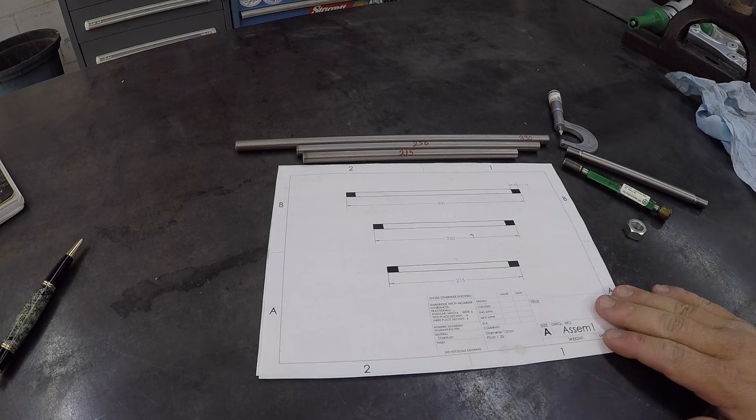We're gonna get started on our next little project here. So this is a job that I'm doing for one of my viewers. He contacted me some time back and asked me would I be interested in helping him thread 3 pieces of titanium. So he supplied the titanium.

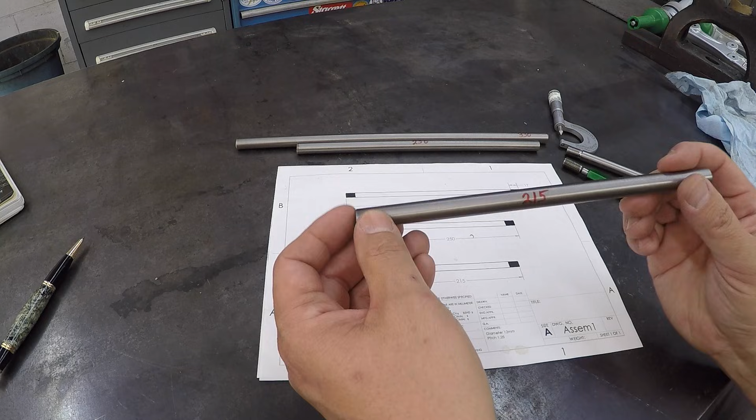This is 12 millimeter, and he just sent one piece, and what I did was I cut them to length, and I actually cut them just a little bit long, and I'll face the ends off. So we got one at 215, one at 250, and then one at 330 millimeters in length there. And then on each end, it's going to be threaded 17 millimeters back on each end at a 1.25 thread pitch. All right, pretty simple.

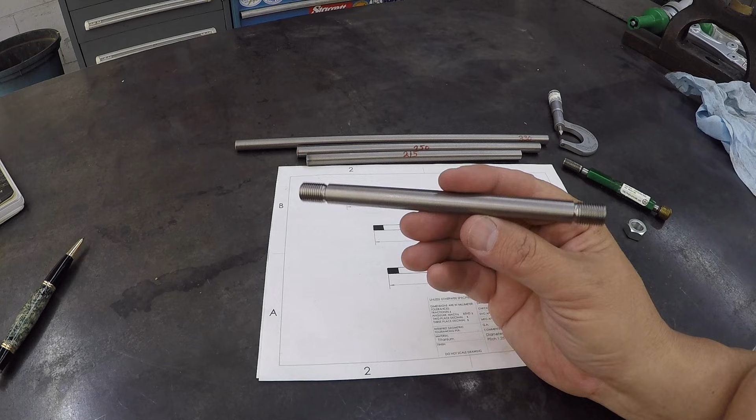Although rarely do I ever cut titanium, so hopefully it's not going to be that much of an issue. But I went ahead and took the sample piece that I had left over, and I went ahead and just did a little practice run, got the lathe set up for the right thread pitch, and you can see that we've actually got a pretty good looking part right here. Everything looks great. I did it just like I was going to do those right there.

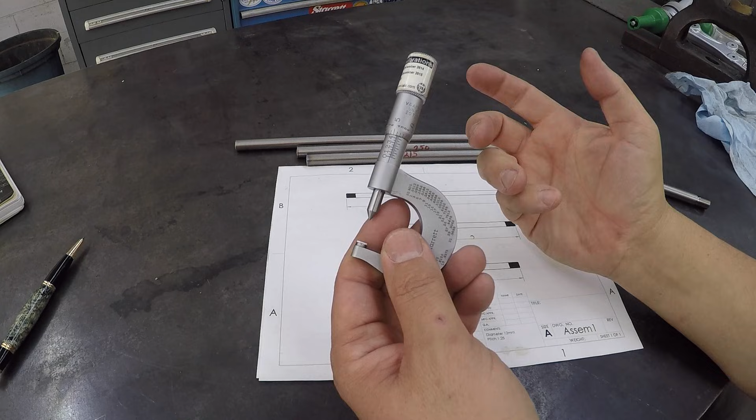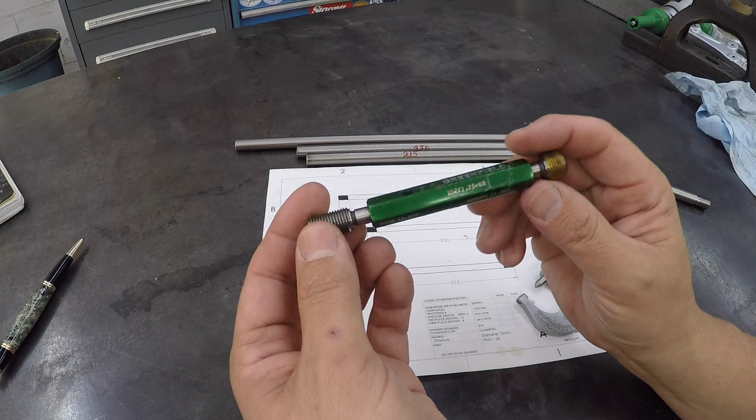And what I'm going to use to measure the thread pitch right here is my Starrett thread pitch mic. Now I do not have metric thread pitch mics. All I have is imperial sizing. So this one is good for 20 to 24, which is going to fall right in that thread pitch of 1.25. So what I do have is a metric go/no-go gauge for 12 by 1.25.

So what I have done is on the go side, I went ahead and measured the thread pitch here with the inch thread pitch mic, took a note of it, and what I'll be shooting for whenever I thread mine is approximately 2/1000ths of an inch smaller than what this thread pitch is right there.

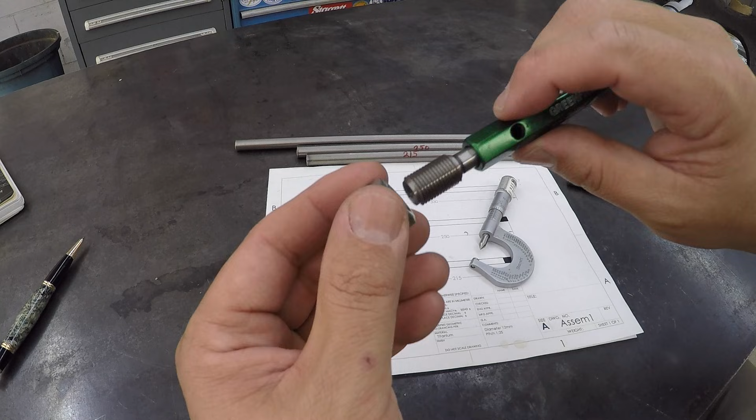All right, I do have a sample nut. I've got a little kit that I keep all different size nuts in, and it fits the go gauge just absolutely beautifully. So you want just a little bit of clearance in that, and that's what I've accomplished with my sample piece. I've gone in there and got it a couple thousandths undersize, and it fits the nut really nice.

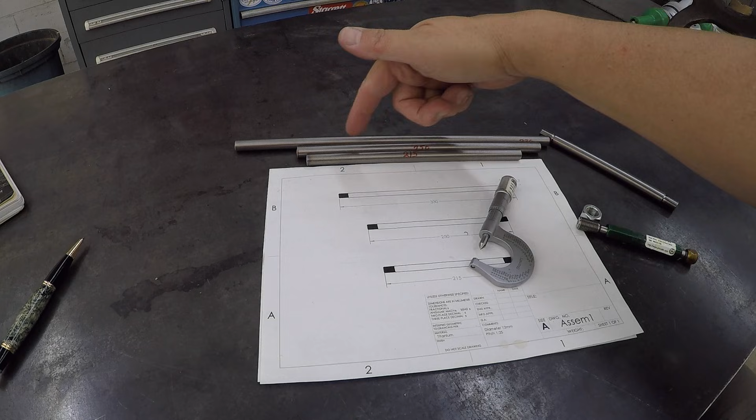So what I'll probably do is go ahead and set them all up, get the ends faced. We're going to machine an undercut with a radius tool, and then turn the OD down about 5/1000ths, because this is exactly 12 millimeter. And then once I have all the ends machined ready for threading, then we'll go in there one at a time, cut the thread. We get one side threaded, flip it around, cut the other side. All right, so let's go down to the Victor lathe and get it done.

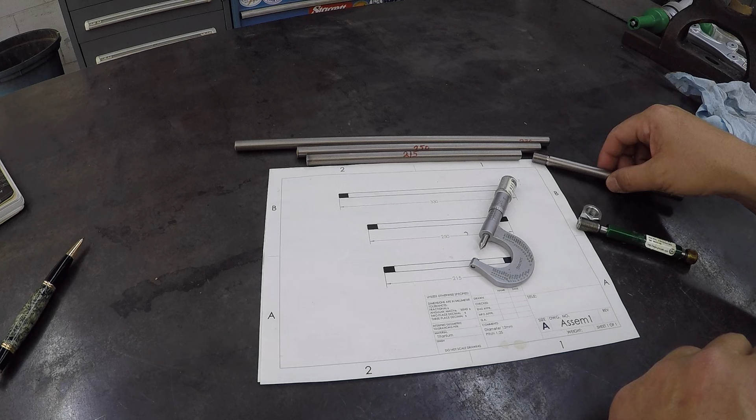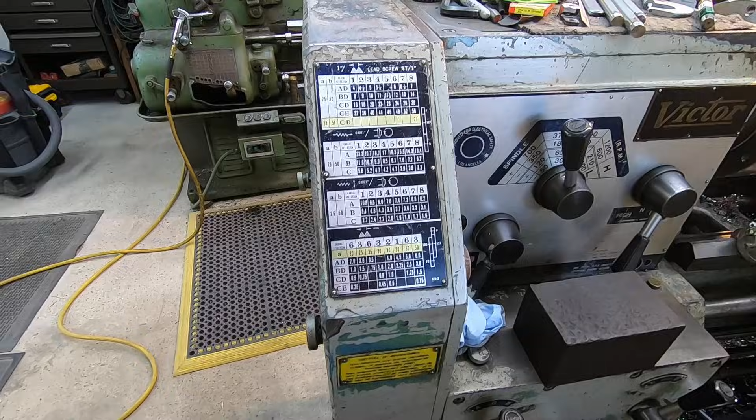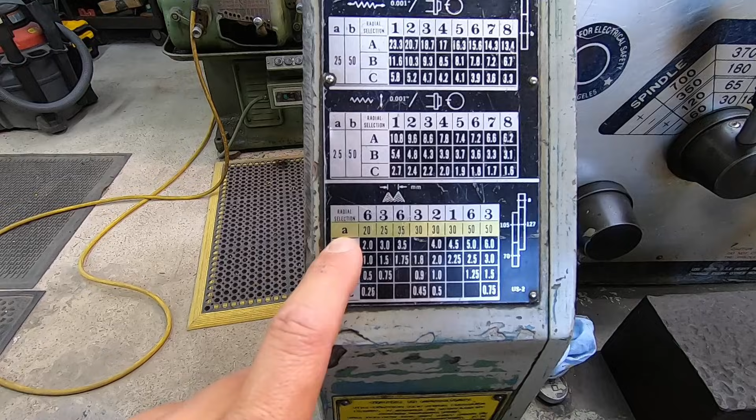All right, we're set up to do our threading now. I thought I would go ahead and show you the machinery setup. On the Victor lathe, you got to swap out the quadrant gears, and so we're going to be cutting a 1.25 right there. So this chart tells you what gears you need to run. If you see A, go across to this line right there and down to 1.25, it's telling you that gear A right there is a 50-tooth gear, and then you got to have the 127, the 105,

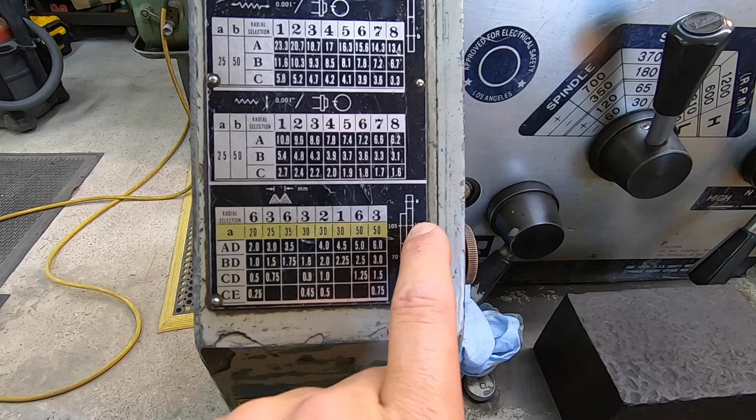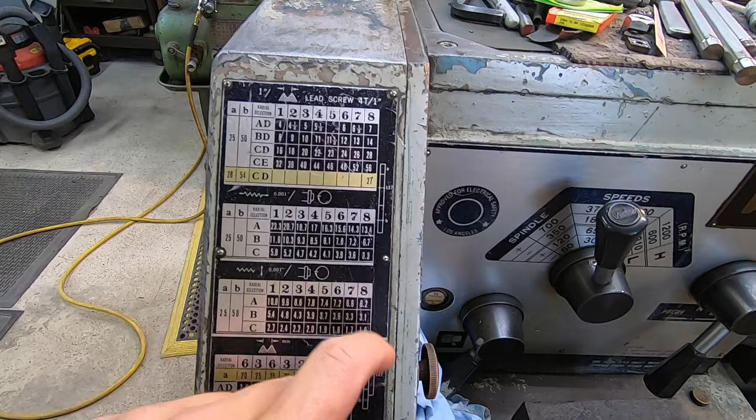and then the 70 at the bottom. Whenever we're normally running up here on this one, you've got a 25-tooth gear at the top, and then a 50-tooth gear at the bottom. So really the only difference is we're running the 50 tooth up here and then the 70 at the bottom. I'll show you what I'm talking about here.

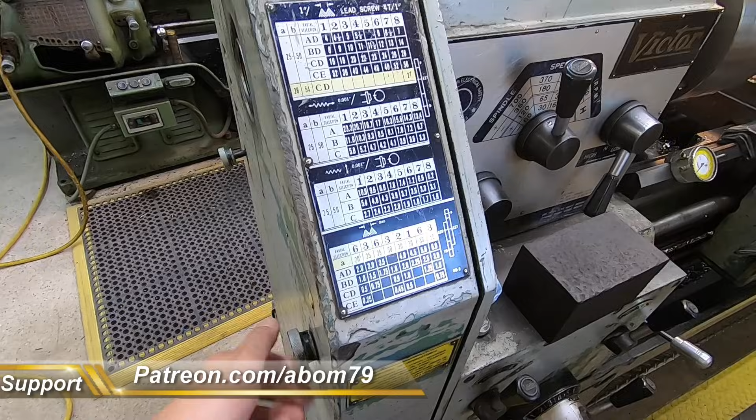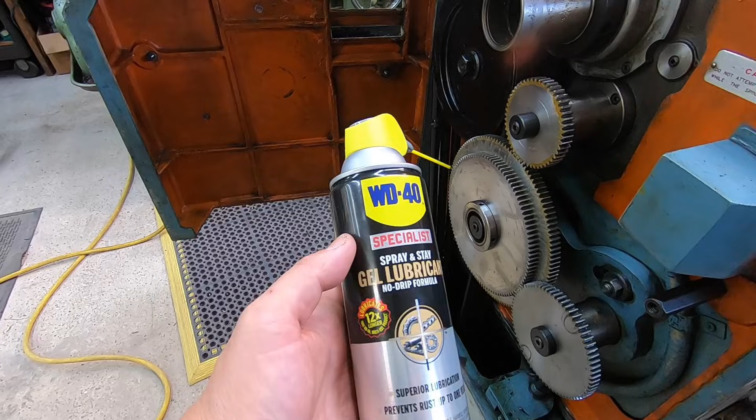So swap out the 25 for the 50 here, and then on this side you're going to flip this one around and then install the 70 on this side right there. So 50 and 70. And by the way, the gears still look good and clean. Last year we cleaned them, and I put the WD-40 gel lubricant, the spray and stay gel lubricant on there, and it still looks really good.

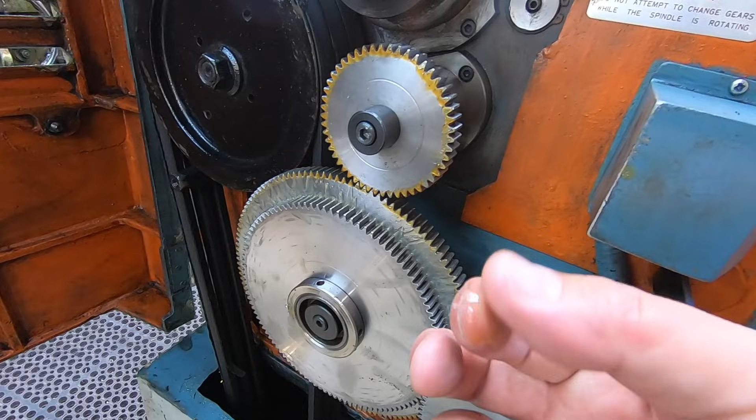And I went ahead and applied a little bit more once I installed the new gears. So the lubricant is looking pretty good. It's been on there for several months now, and it's still good and tacky and keeping the gear teeth nice and wet there. So we are ready to start doing our threading now.

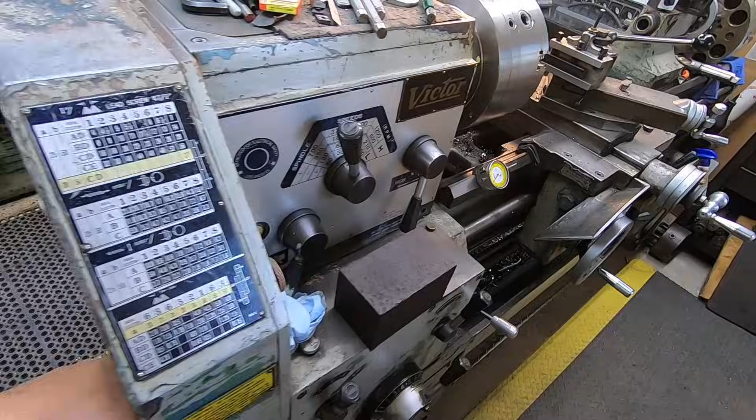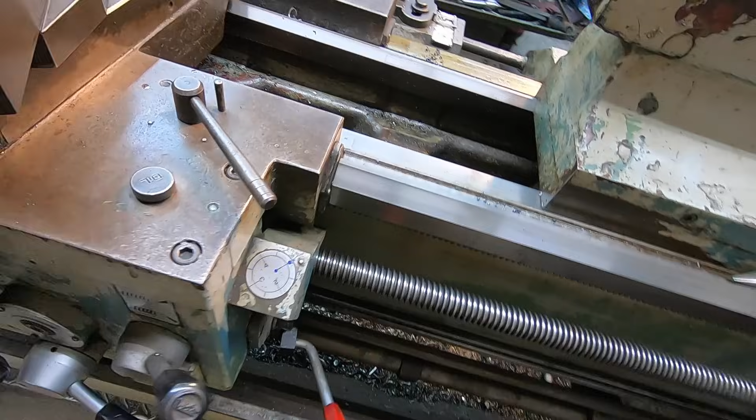So I'll try to mix it up and give you a couple interesting shots, show the threading up here, and then I'll put the camera over there so you can see the way that I work the controls. So whenever you're doing metric, you pick one of these lines right here that you want to engage the lead screw at. I just use one, so I've got my blue dot there as a reference.

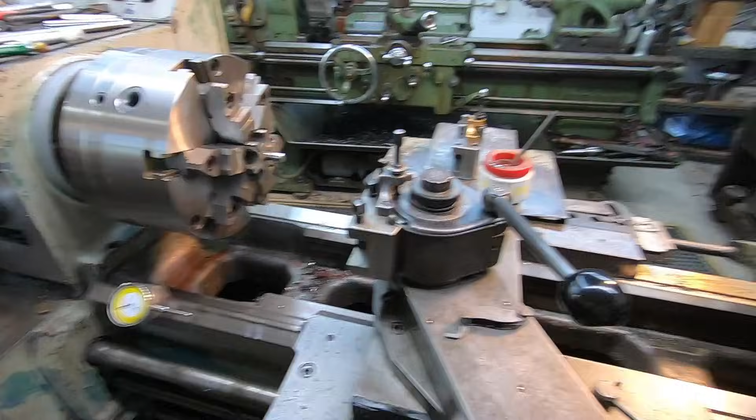And typically when you're doing this kind of threading, you never disengage the half nuts. But the style that I have adopted, and the way I like doing it now, is to release the half nut, stop the machine, reverse the spindle, and then line up the blue dot to back out the carriage. And that allows you to get up really close to something and then disengage it without worrying about your carriage coming in and hitting something, in this case being the chuck, against your tool right there. I'll show you what I'm talking about.

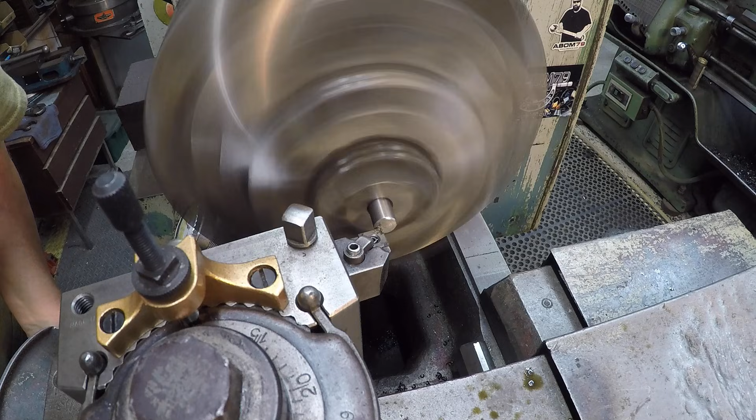So each one of them I cut about 2 millimeters longer using my metric rule. So we're just going to face each side and make them look good. We'll just go like 30 thousandths on each side. It shouldn't be that critical on that absolute length there. I'll just do everything in steps or in stages, so I'll get all the facing done, and then once we get all the facing, I'll pull them out. We'll do our undercut and our OD turn on each end.

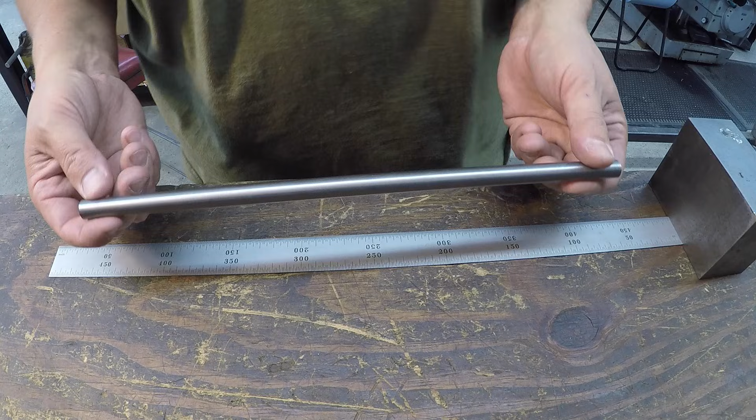I've got my 500 millimeter Starrett rule right here. I'm just going to butt it up against this block, and I've got the rod here that we faced. I'm just going to check it against the rule. So 330 is right there, and it looks like I'm just a shade over the line. So we're going to call that one good on 330. There was no kind of tolerance on these lengths right there. So if you're within 10-15 thousandths of that, it should be just fine. So I am right there on the 330 line.

There's our 250. A quick check on it too. Right at it. About a line over 250 there. All right, one more to face off. Last up for our facing, 215 millimeter. And we are on it right there. 10, 15. Yep, looking good. All right, so now we'll go on to our undercuts and turn our OD down about 5 thousandths. Chamfer the ends too.

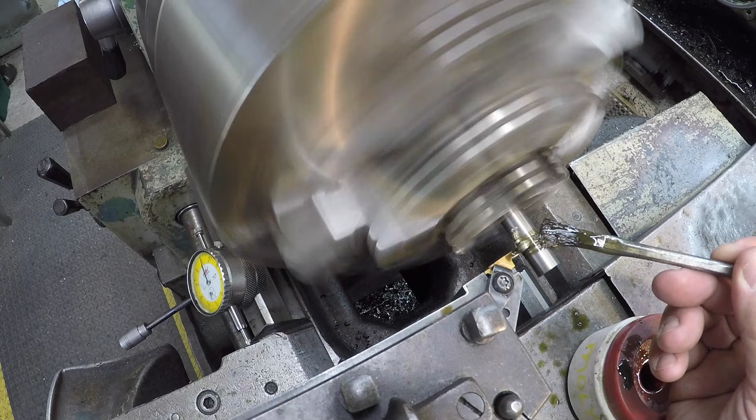I got a 1/8 wide radius tool there. Just touching the end, and so we'll go 17 millimeter. Step over here. That'll be 670 thousandths. And then our touch off, I'm gonna go 100 thousandths. I'm gonna use some Moly D for the lubricant here. Just like that. Get rid of our nasty chip.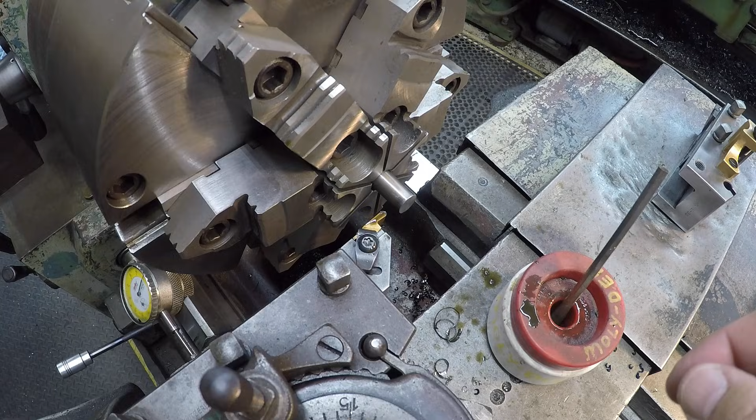So I've got the material exactly 30 millimeters from the face of the jaw there. So all we're going to have to do at this point is just flip it around. We'll flip it around and then make it 30 millimeters from the end right there. Just like that. And we should be lined up within a few thousandths of our zero mark on our indicator. All right, I'll keep repeating that on the other two there.

We're going to go ahead and get the diameter turned now. I want to put it about 5 thou under, so it's measuring exactly 472, which is 12 millimeter. So I'm going to turn it 5 thousandths under. Go ahead and mic it and make sure that we're there; around 467 or 468 will be good enough. I'm only 470 right there. Yep. All right. Take a couple more.

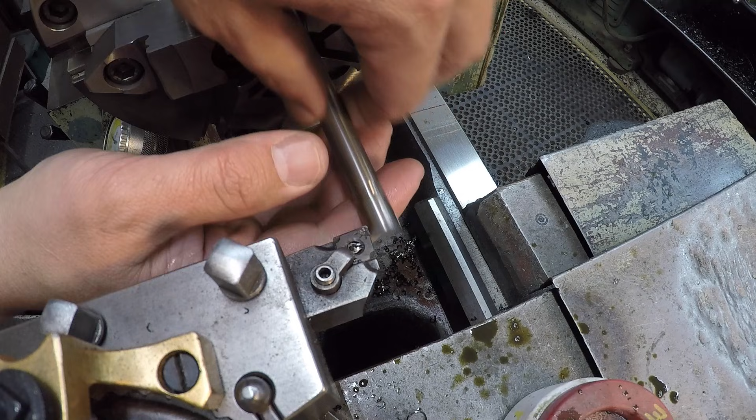I'm just going to leave the cross slide set right there. Yeah, okay, we're at 468, so we'll leave the cross slide set to that point, and we'll just flip it around. If it was just one end, or even just one rod, I'd probably just get all one side done, and then flip it around and do the other side. But once I get the threading set up, I don't want to change that. I want to just go to each one and thread it.

Just make sure, double check it. Should be good. 468. All right, we'll get the other two threaded now. All right, we're ready to go ahead and get this thing going. We'll make a scratch pass and then check our pitch. I'm running 370 RPM. Just waiting on my blue dot to come around.

And once we get to the undercut, I'll disengage the half nut back out. And what I'm going to do is reverse the spindle and engage the half nut on that same tick mark, and then leave it engaged and just stop the machine. That way you can kind of take your time.

I'm going to run the cross slide back into 0, and then take the thread pitch gauge and check it just to be sure that you're on the proper pitch there. And in fact we are on 1.25. So now I can go ahead and start making some cuts.

I'm going to take a file and hold it backwards on the thread just to remove any burr that might be on top of it there. Just like that. Blow it off to get rid of any chips. And I don't know if you can see it or not, but this is where I'll take my thread pitch mic and go ahead and start getting some measurements on it and get it threaded down to the thread pitch that I want it at.

That feels pretty good right about there. So yeah, we've still got a little ways to go. Come into our 0, a feel for this thing. Feels good right about there. All right, still got a little ways to go, not much.

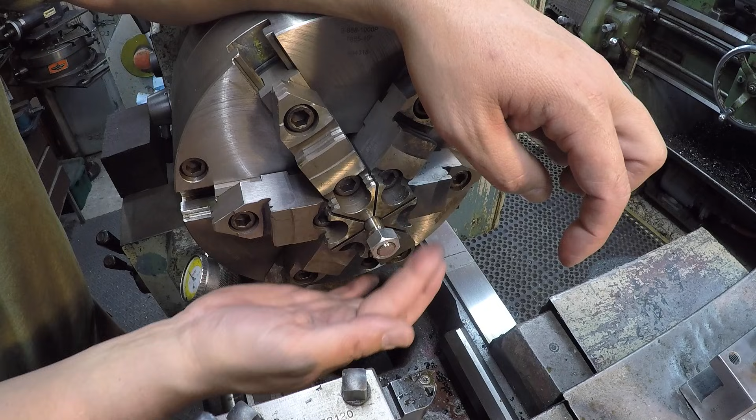All right, that one's right at the bottom side of what I wanted to thread it at. So just check it with this standard nut right there. Seems like it's fitting right where it needs to be. So that one's ready to go. And what I'll do is we're going to go ahead and make sure that it's filed good. Disengage the half nut.

Just get rid of any of them burrs that might be on it, and that last thread where it rolls over into the groove there, we want to get rid of that as well. All right, so it should be ready to go, that end right there. I'm going to come back to all of them. There's a sharp burr right there where this undercut is, but I'll come back in later with the chamfering tool and cut all those last to get rid of that sharp edge.

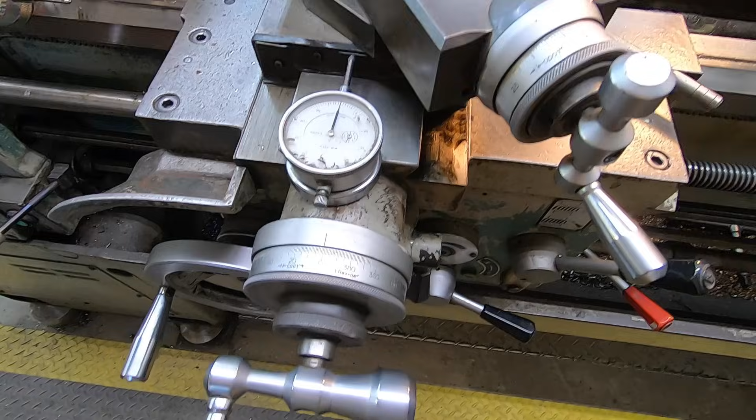There's one detail that I had left out. So we've got our cross slide set to 0. I've already got the tool touched off, by the way. This is set to 0, this is set to 0, and then I set this mag-backed indicator right there with a 0 as a backup to this one right here, because I have had plenty of times running this lathe and other lathes where when you go back to 0, it's not in a true 0 position, it's moved forward some.

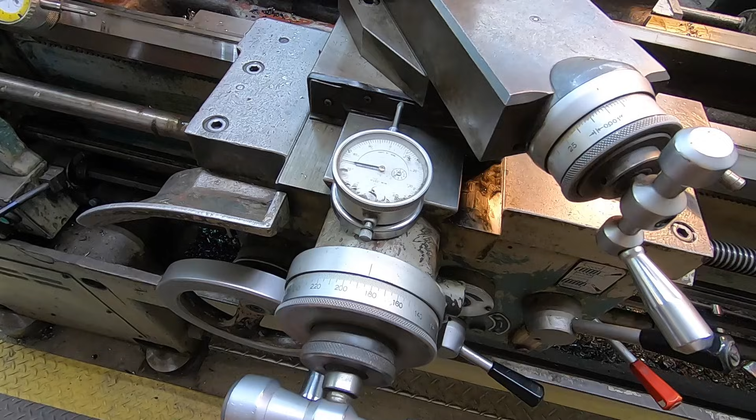So whenever I go to back out the tool like this, and then you bring the carriage back, and then you're ready to go back in and reset your cut. So you bring this around to 0 like so, and then you're lining that one up on 0 as well. So these should match, and this one should never change.

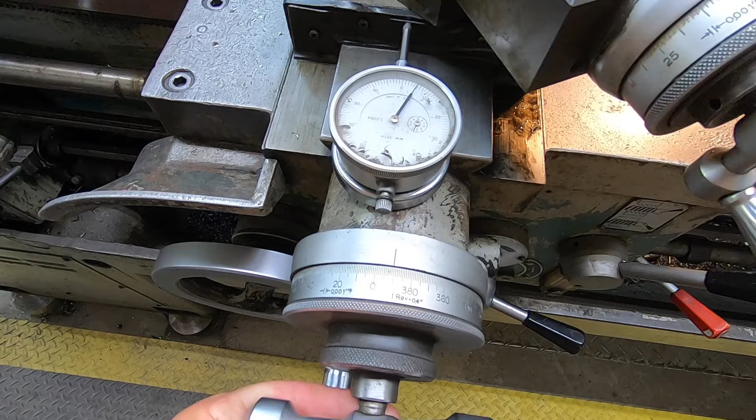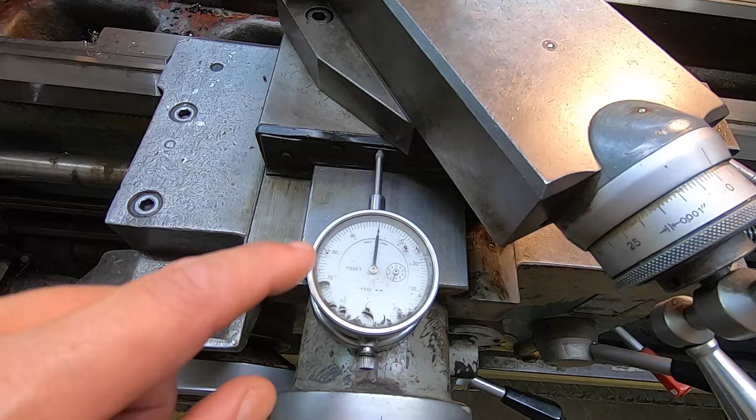So usually if this is off just slightly, I'll watch the mag back indicator go up to 0, and then I'll judge it right there. But see, they both lined up there perfectly. So good little trick to do just to kind of help keep yourself on track right here and making sure you're going back to the same 0 every time.

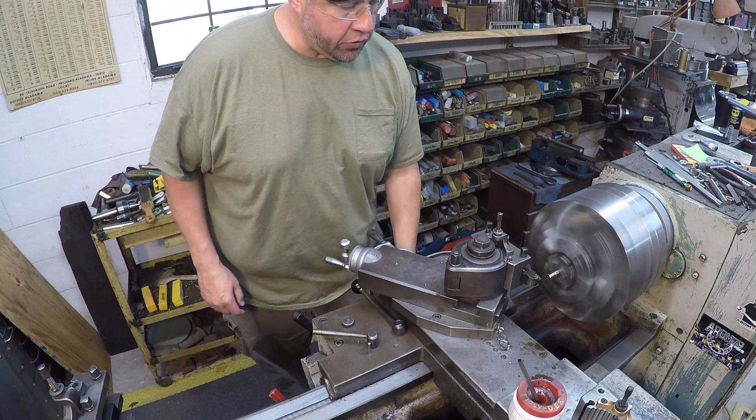All right, we're going to start on the next end there. So we've got all of our 0s reset, dialed in 5/1000ths on the cross slide. Waiting for my half nut to come around here to the tick mark I want. I don't have to check the thread pitch because I haven't changed anything on the machine. Come back into our 0, go another 5.

We'll go ahead and put a little Moly D on there this time and engage it. Got my hand on the half nut lever to disengage, stop it with the foot brake. I have to reverse it on this side.

Keep doing this until we get it down where we want it. I got a little red dot on the collar here of where I machined the first one to, so I'm approaching that red dot.

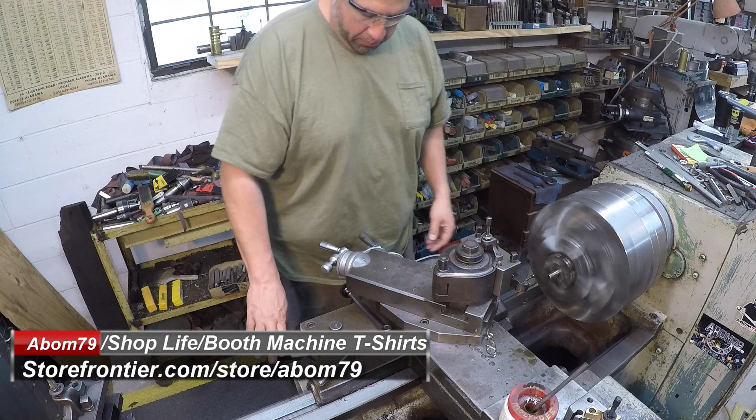Getting ready to start our next one here. Bringing the dot around.

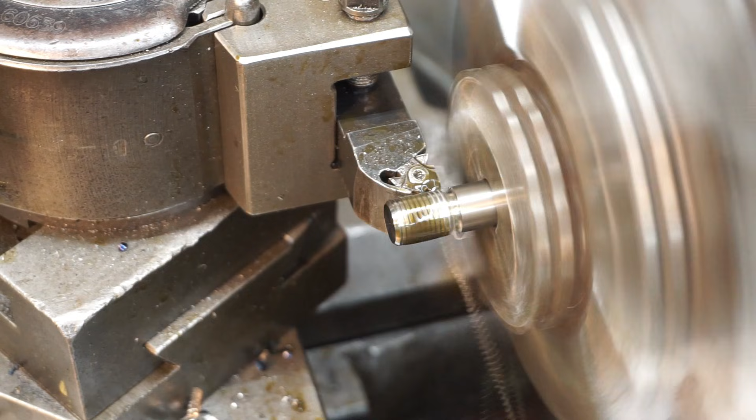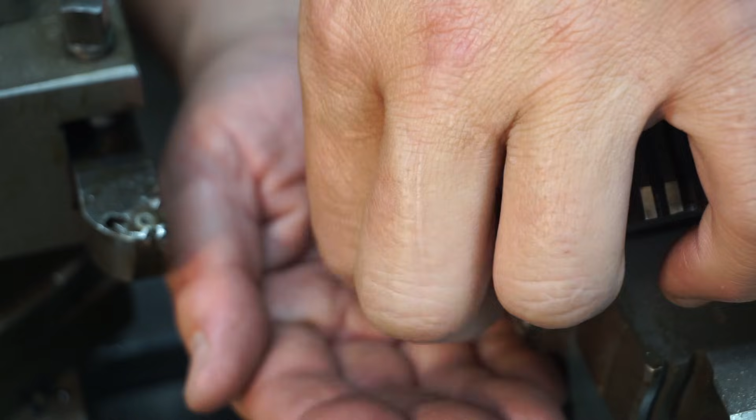That might be it right there. Good fit. I'm right on my red dot where I've been threading the other one, so I know I'm good right there. Go ahead and give it a check with the pitch mic right there. I'm right where I want to be.

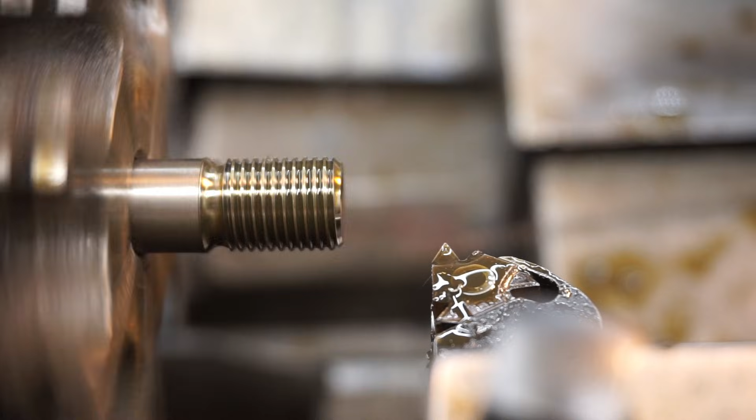We got all the threading done, so I'm going back in there with them, and we're gonna remove this sharp edge here and then give it a little polish with some gray Scotch-Brite. Just get rid of that sharp edge there. And let me find my file. A little bit of a file right there.

And I take this gray Scotch-Brite, double it over. Just give it a little polish. Help remove any of those little fuzzy pieces still there in the thread. So then, got a nice soft feeling thread there that's not sharp. So we'll just repeat that on all the other ends till we get them all done. This one's completed though.

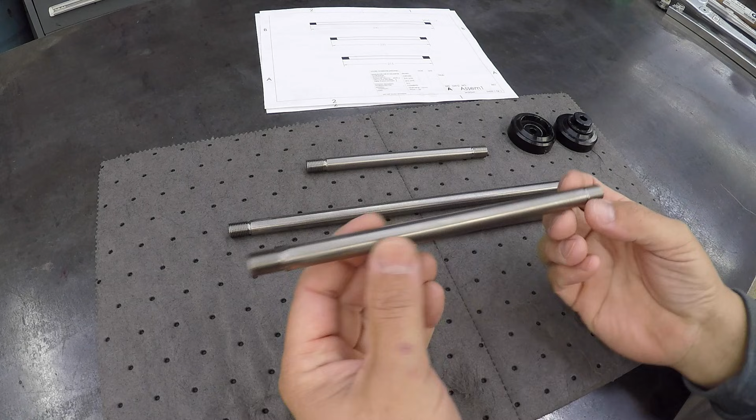All right, we got all of our titanium rods finished up. I'm happy with the results. I think they look good, and so these belong to Ed, and I think Ed is gonna, hopefully he'll like the way they turned out. They should be ready to go. And again, this was just a sample. This one right there, just extra material that I wanted to practice on, and so those are done.

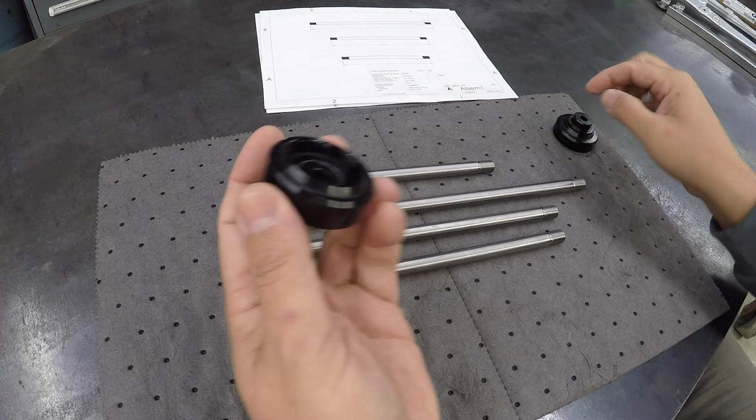He did send these two pieces here. These are some aluminum parts for whatever he's building to go along with these titanium rods that just need modified. So this one's got the counterbore in it, and he sent a print along, this other print, and I'm gonna work on these next and get these knocked out. So here's this guy right there. He needs that inner bore bored to 32 millimeter.

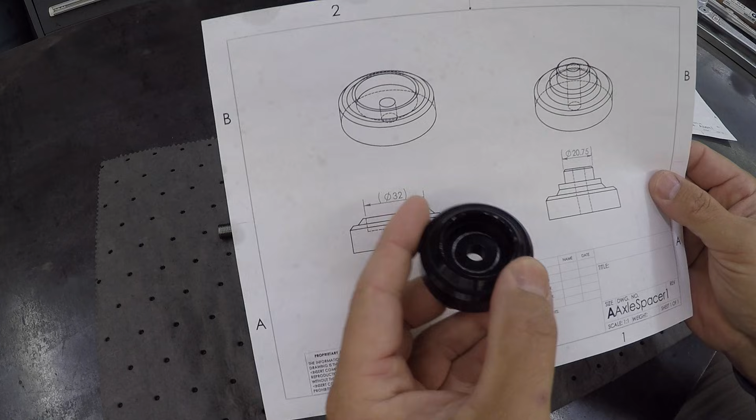So we're gonna knock that out, and then he's got the other piece here that's got the male, the OD here, and he needs that turned to 20.75 millimeter. So those are the other two little pieces that we're gonna knock out right there. Go ahead and get those done, and then after that, Ed's parts will be finished up.